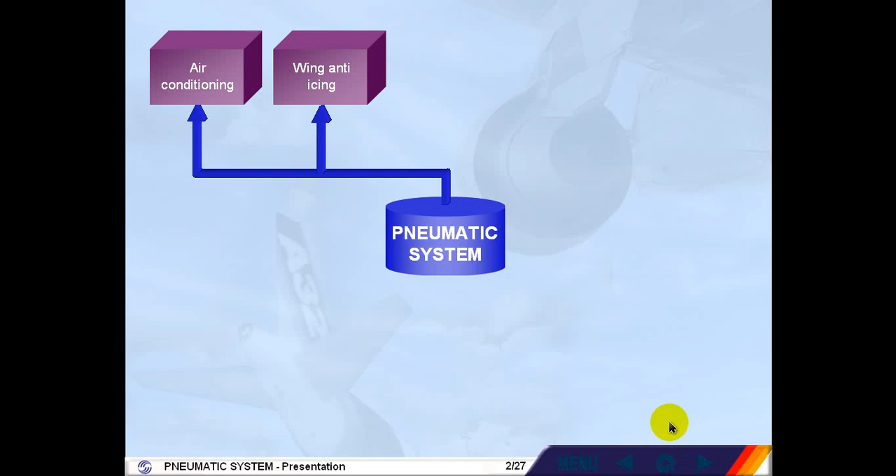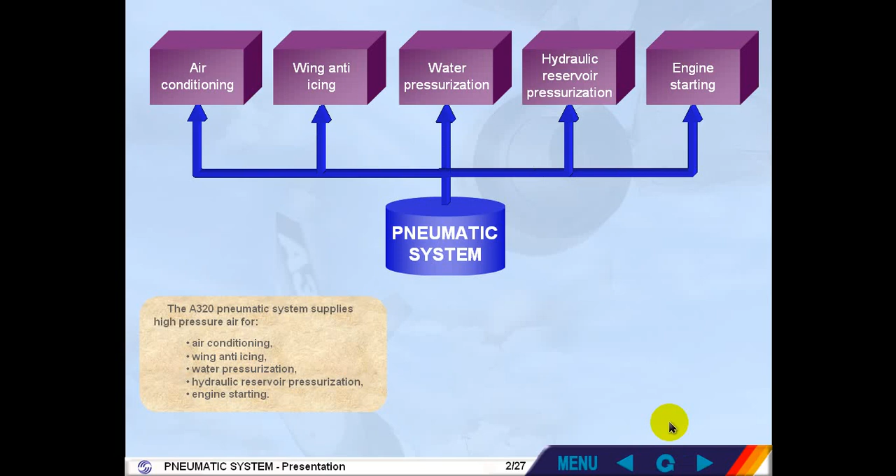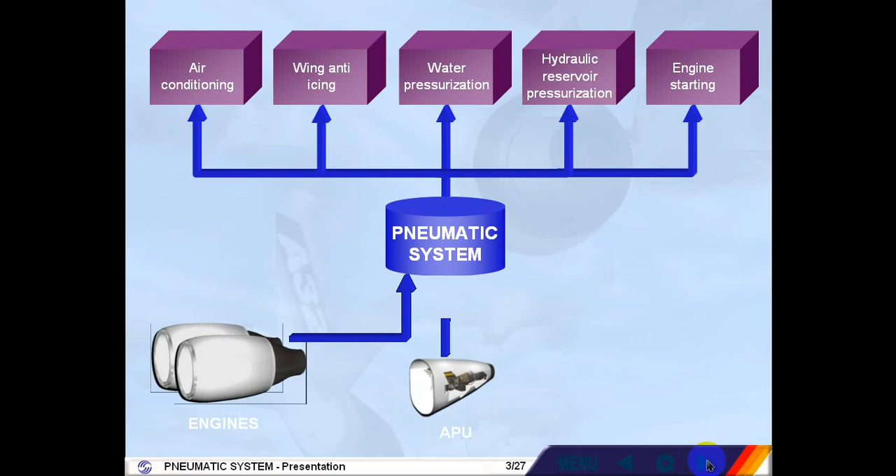The A320 pneumatic system supplies high-pressure air for air conditioning, wing anti-icing, water pressurization, hydraulic reservoir pressurization, and engine starting. High-pressure air can be supplied from three sources: the engine bleed system, the APU, and an external high-pressure ground power unit.

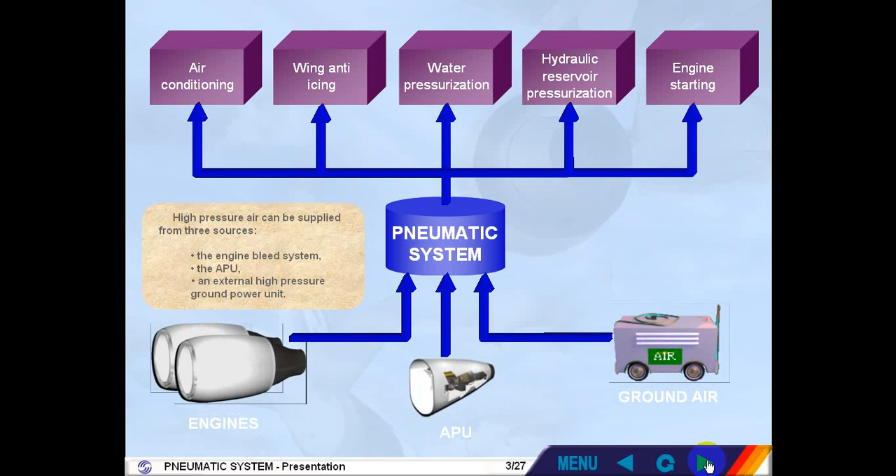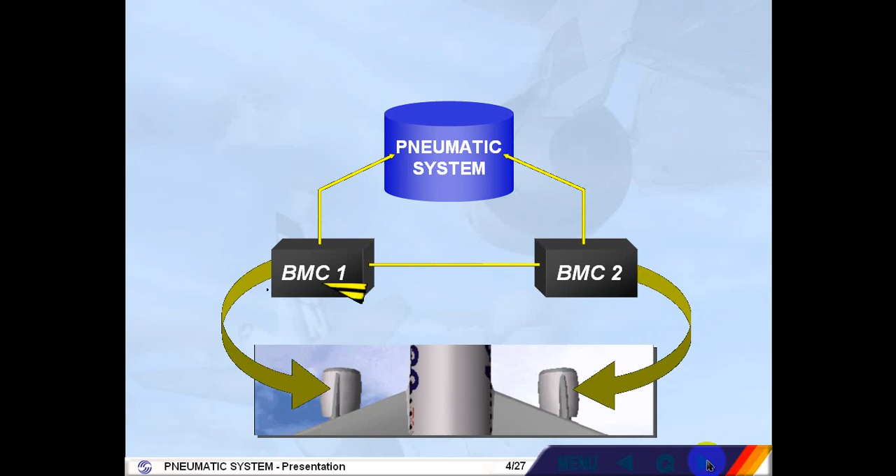The pneumatic system is controlled and monitored by two bleed monitoring computers, BMC. There is one BMC for each engine bleed system. Both BMCs are interconnected, and if one fails, the other takes over most of its functions.

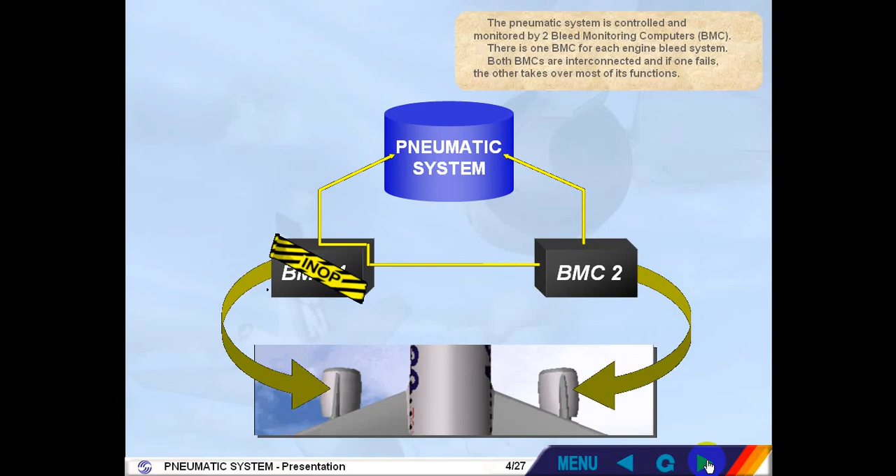There are hot air leakage detection loops installed in the vicinity of the hot air ducts in the fuselage, wings and pylons. If a leak is detected, a signal is sent to the BMCs, which automatically isolate the affected area.

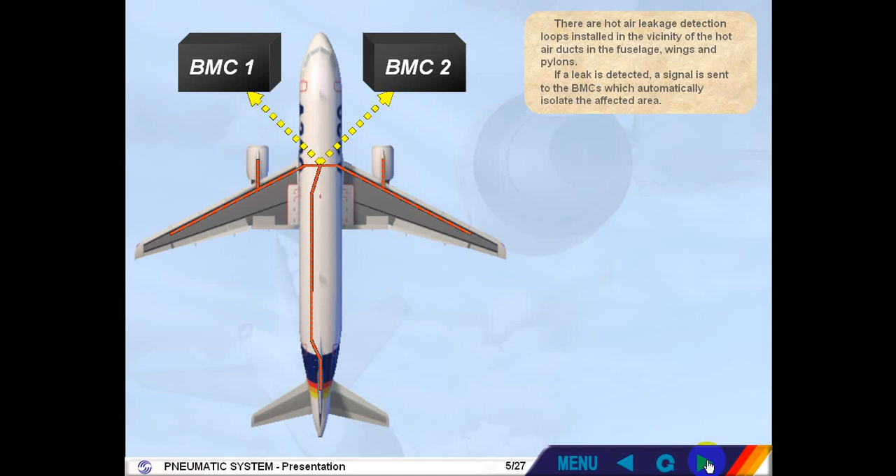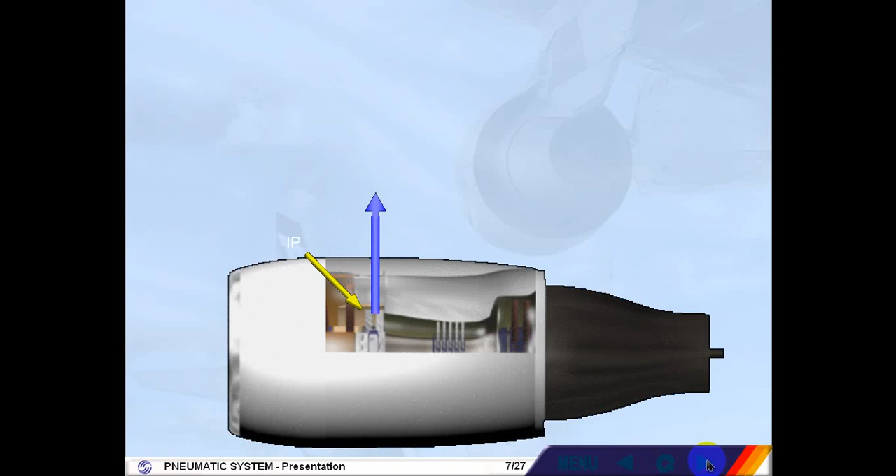In flight, the primary source for high-pressure air is the engines. Both engines have similar bleed systems. Air is bled from two compressor stages of the engine, the intermediate pressure IP port and the high pressure HP port. There is an HP valve which can cut off bleed air from the high pressure port. It is automatically controlled by the system.

The high pressure section HP is only used when there is insufficient pressure from the intermediate output IP, i.e. when the engines are at idle. Once the engine speed is high enough, the IP pressure is sufficient and the HP valve closes.

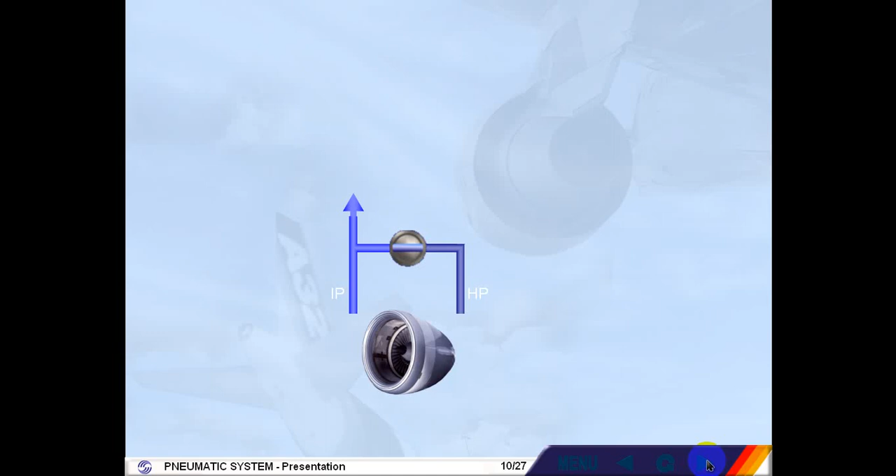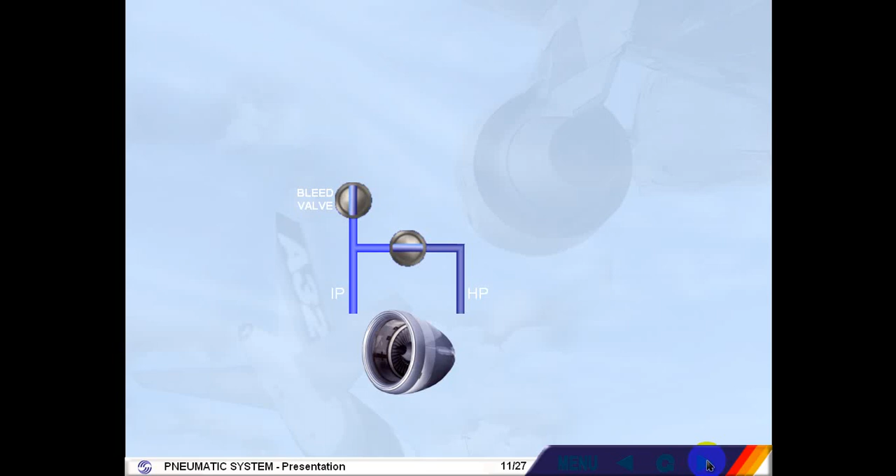The air extracted from the compressor then goes to a bleed valve which acts as a shut-off and pressure regulating valve. Since the temperature of the bleed air is high, it passes through a pre-cooler before being distributed to the users. The pre-cooler uses cool air from the engine fan to regulate the temperature.

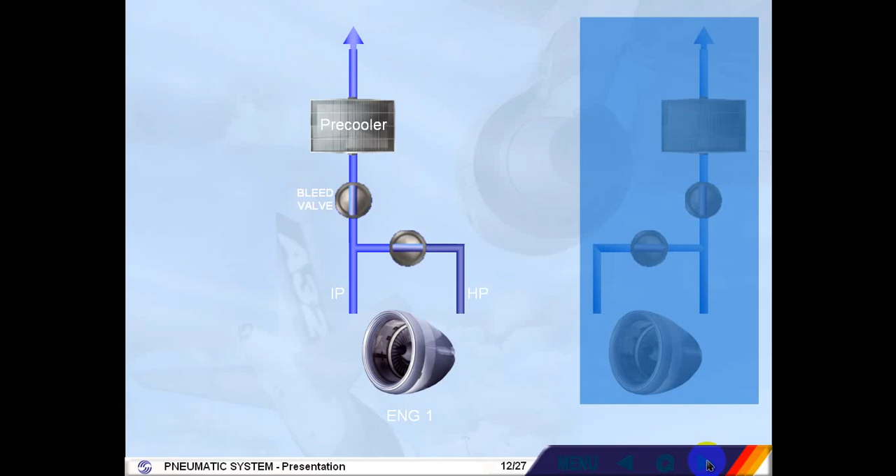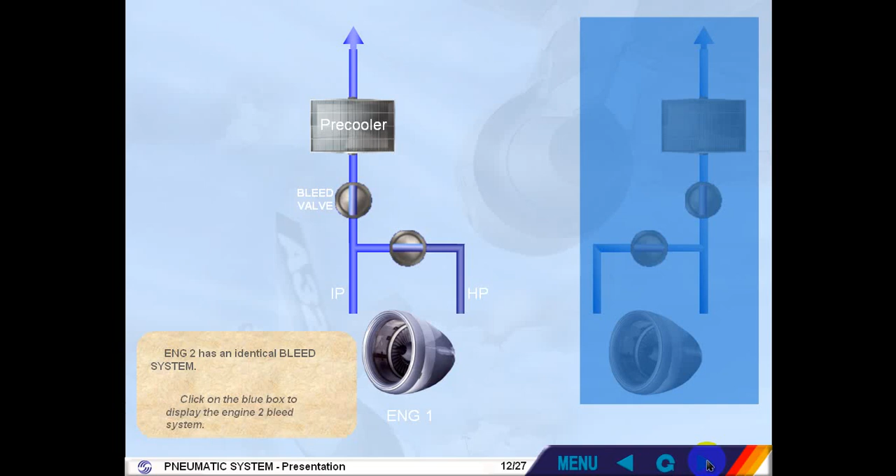Engine 2 has an identical bleed system. Click on the blue box to display the Engine 2 bleed system. Both systems are connected by a cross-bleed duct. A cross-bleed valve permits their interconnection or isolation.

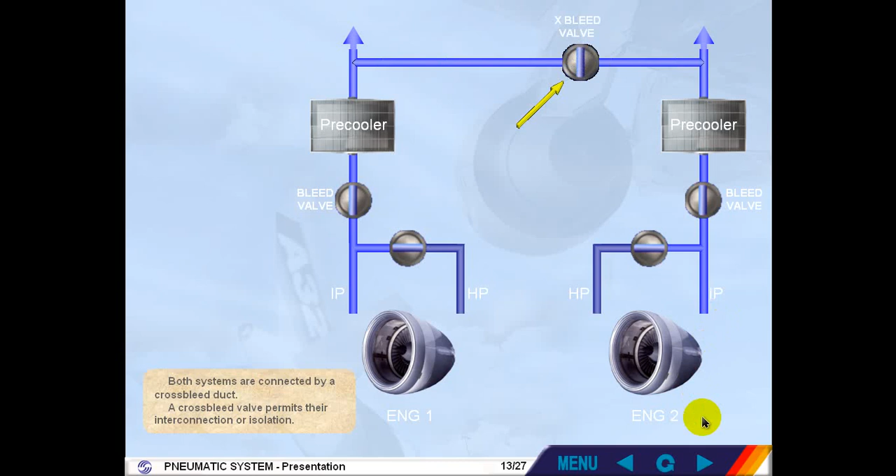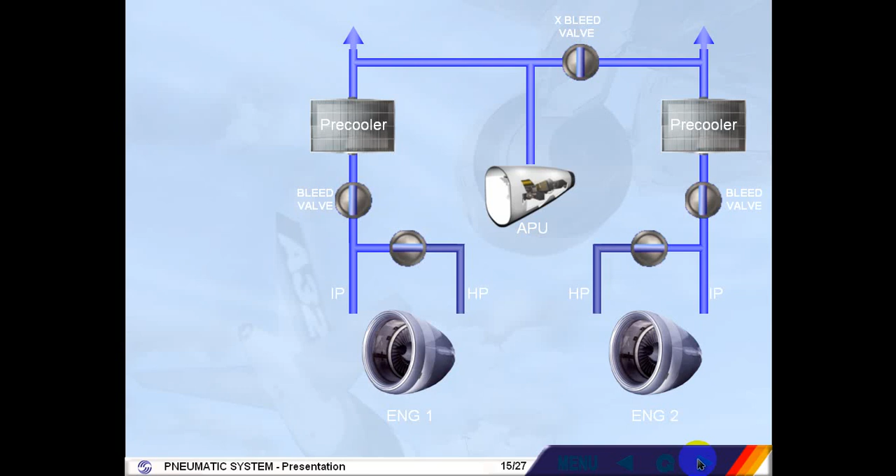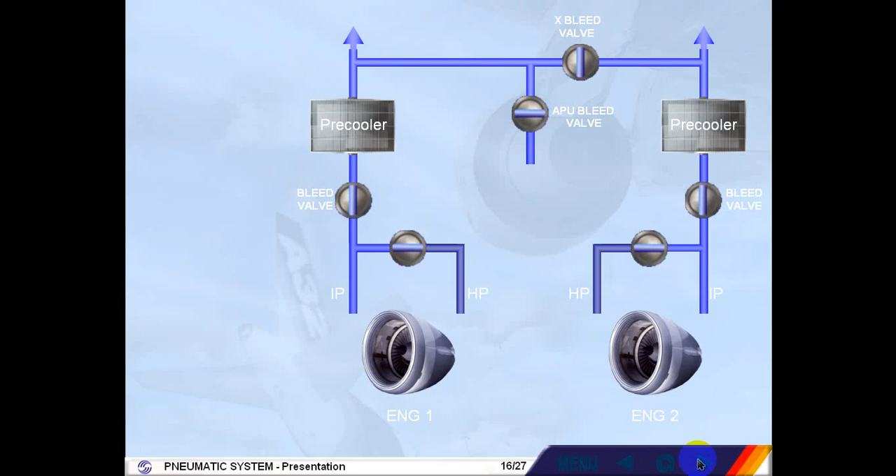The APU can also be used for bleed air supply. This is usually done on ground for air conditioning and for engine start. However, APU bleed air is also available in flight. APU bleed air is controlled by the APU bleed valve, which operates as a shut-off valve. Should the APU not be available, a high-pressure ground air unit can be connected. This completes the pneumatic system.

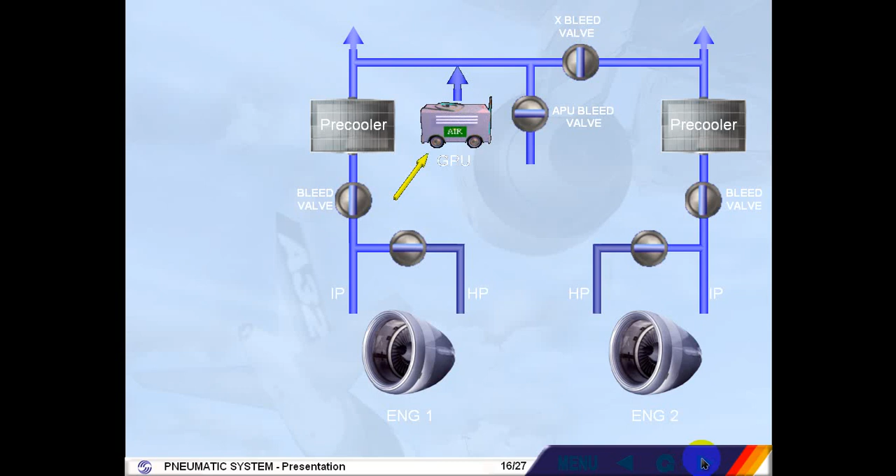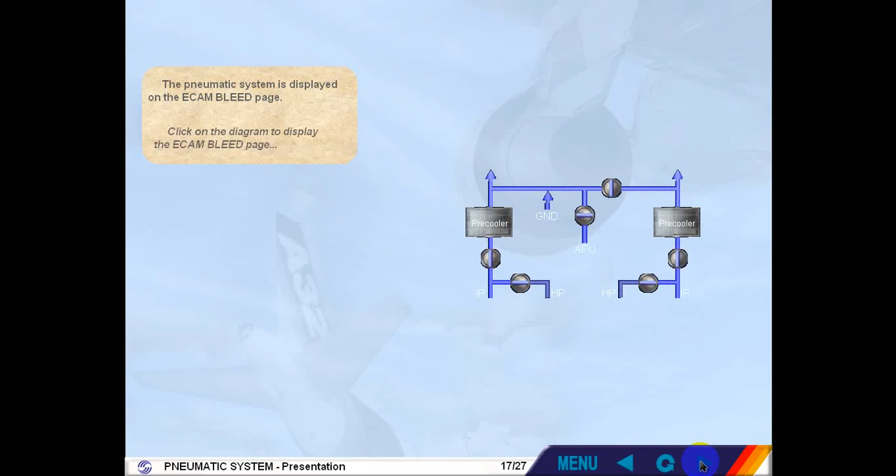We will now show you how system information is displayed to the pilots. The pneumatic system is displayed on the ECAM bleed page. Click on the diagram to display the ECAM bleed page. Information on the pneumatic system is displayed on the lower part of the ECAM bleed page. Note, we have shaded the upper part of the ECAM bleed page because it is related to the air conditioning chapter. This will be covered in a later module.

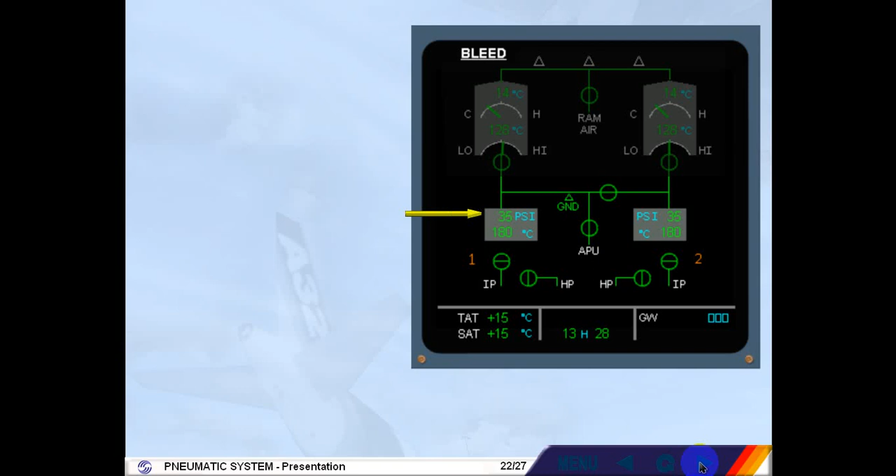Let's identify the system components on the ECAM page now. The IP and HP ports, the HP valves, the engine bleed valves, the pre-coolers, the APU bleed valve, the cross-bleed valve, the high-pressure ground connection. The following information is also displayed: bleed air pressure, bleed air temperature, engine identification numbers.

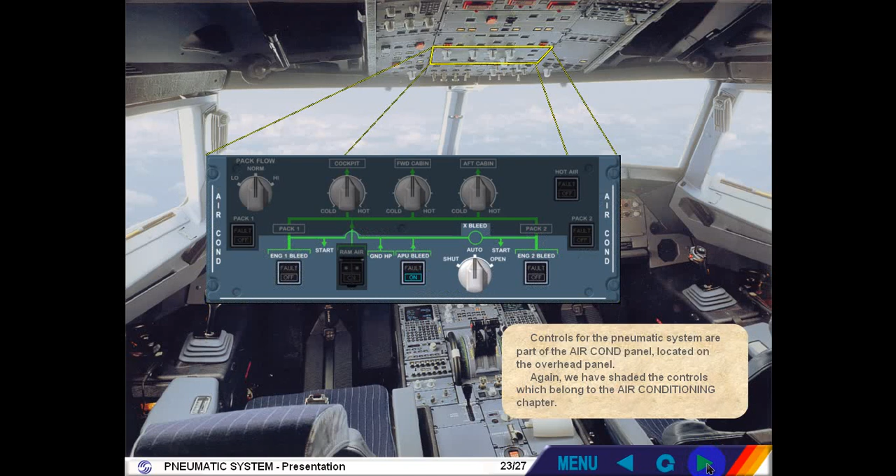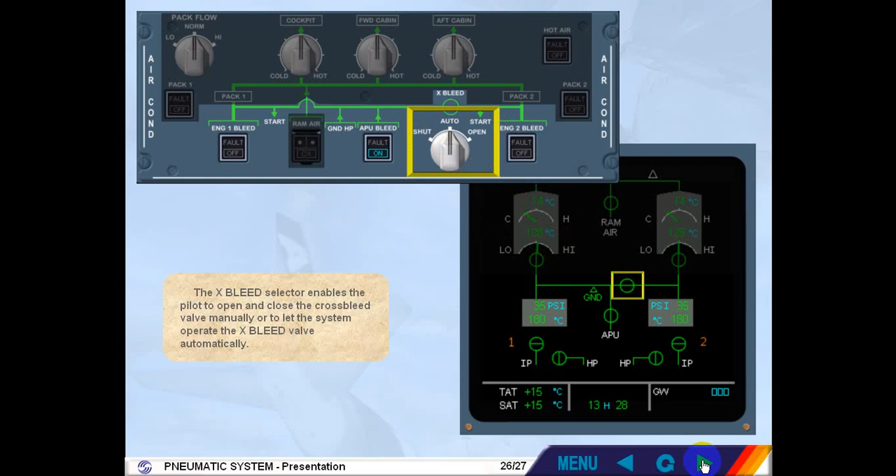Controls for the pneumatic system are part of the air conditioning panel, located on the overhead panel. Again, we have shaded the controls which belong to the air conditioning chapter. Each engine bleed valve is controlled by its associated push-button switch on the air conditioning panel. The APU bleed valve is controlled by its associated push-button switch. The cross-bleed selector enables the pilot to open and close the cross-bleed valve manually or to let the system operate the cross-bleed valve automatically. You will learn to interpret all the indications and operate these controls in the normal and abnormal operation modules.

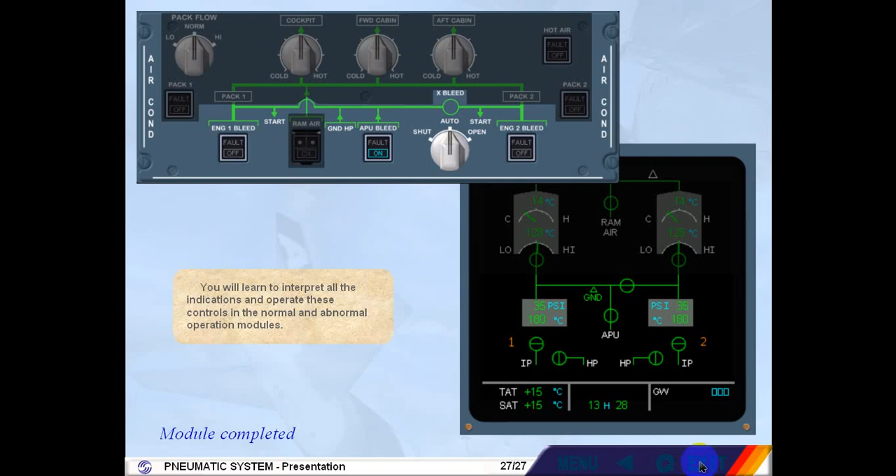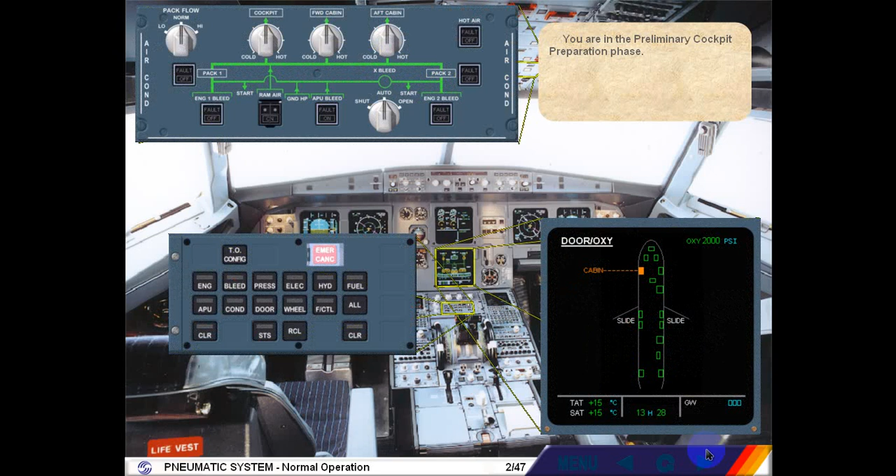You are in the preliminary cockpit preparation phase. To better illustrate what occurs in the pneumatic system, select the ECAM bleed page using the ECAM control panel. Let's talk about the indications on the ECAM bleed page. The engine identification numbers are displayed amber because the engines are not running. During preliminary cockpit preparation, all white lights must be extinguished. With the engine bleed push-button switch in the lights out position, the bleed valves are automatically controlled by the system.

Observe the symbology on the ECAM. The bleed valves are cross-line green because they are fully closed. The HP valves are also automatically controlled by the system. They are displayed cross-line green to indicate that they are fully closed. The bleed temperature is displayed in green. The bleed pressure is displayed in amber because no pressure is supplied. The ground HP connection indication is always displayed in green when the aircraft is on the ground, whether the ground unit is connected or not.

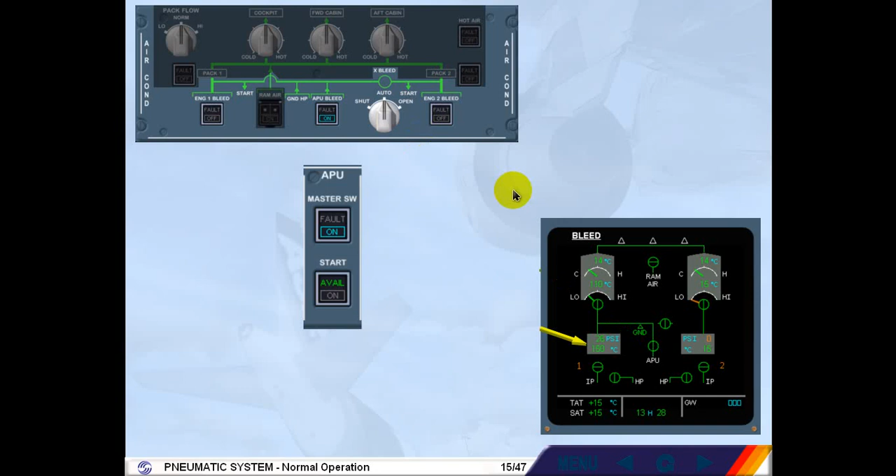Observe the indications. The APU bleed valve is displayed inline green, indicating it is now open. The left side bleed pressure and temperature are displayed in green because they are in the normal range. The cross-bleed valve is automatically opened. It is displayed amber during transit and inline green when fully open.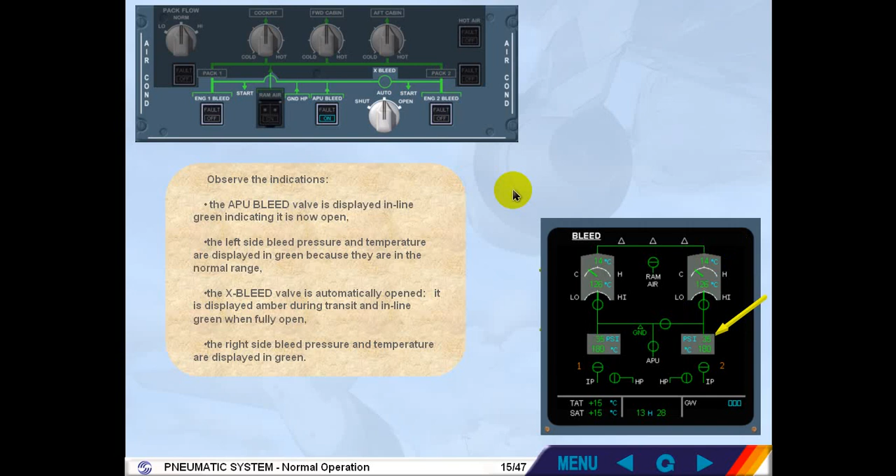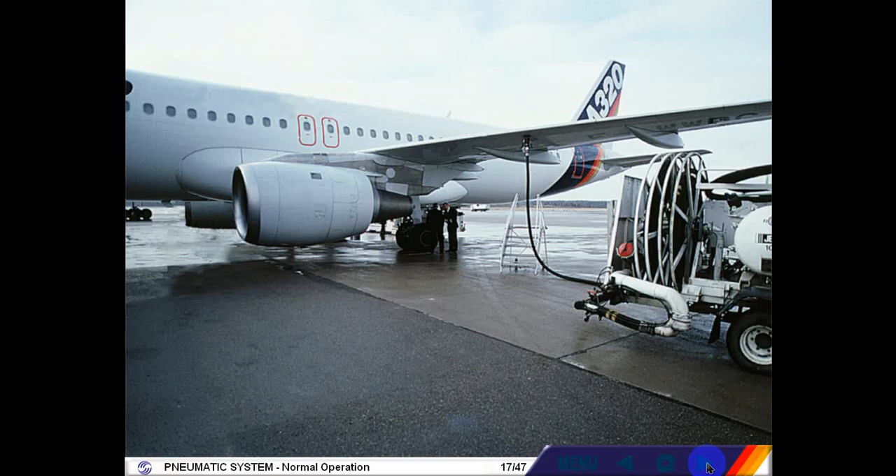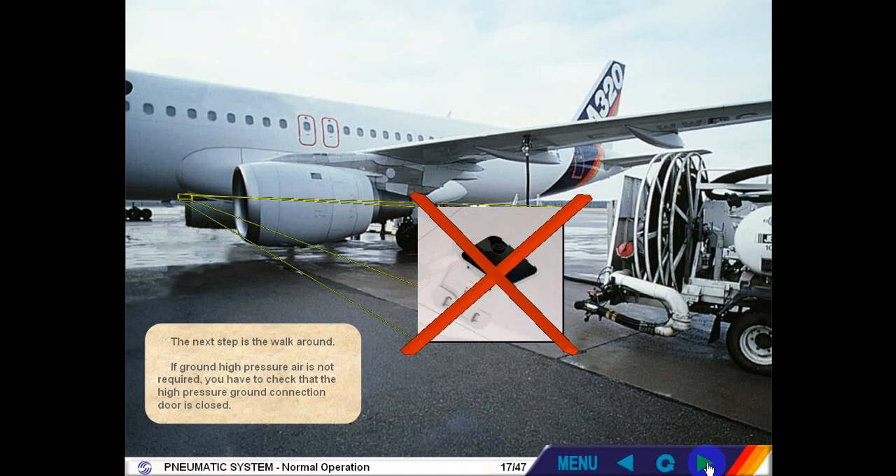The right side bleed pressure and temperature are displayed in green. As you have learned in the APU chapter, the memo APU bleed is displayed on the engine warning display. The next step is the walk-around. If ground high-pressure air is not required, you have to check that the high-pressure ground connection door is closed. Usually, APU bleed air is used for engine start.

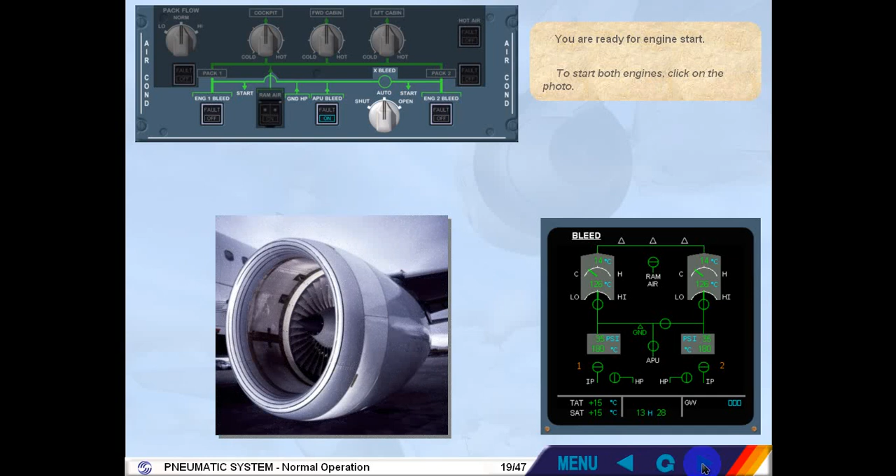The pressure displayed on the bleed page is also indicated on the ECAM engine page, which will be explained in the engine chapter. You are ready for engine start. To start both engines, click on the photo. Notice that the engine identification numbers have turned white, indicating that the engines are running. The engine bleed valves remain closed because the APU bleed valve is open and the APU has priority over the engine bleed. Now you may switch off the APU.

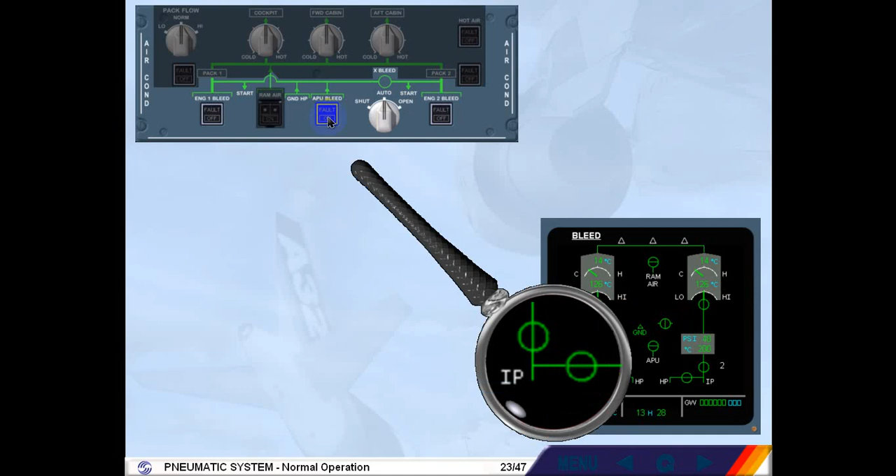Switch APU bleed off. Observe the ECAM. The APU bleed valve is closed. The cross-bleed valve is automatically closed. It is displayed amber during transit. The engine bleed valves and HP valves are displayed inline green because they have been automatically opened.

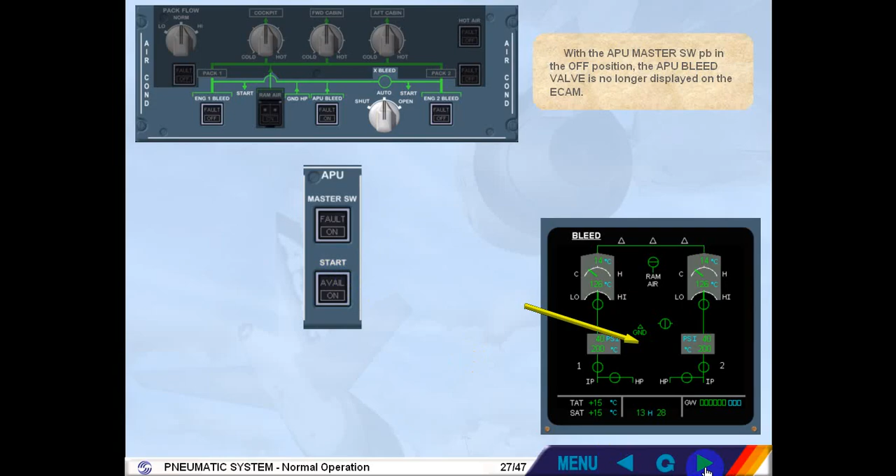We will now switch off the APU. Click on the APU master switch. With the APU master switch push button in the off position, the APU bleed valve is no longer displayed on the ECAM. We will now talk about the changes that occur in the pneumatic system during takeoff. Note, normally the ECAM engine page is displayed for takeoff. For training purposes, we will display the ECAM bleed page.

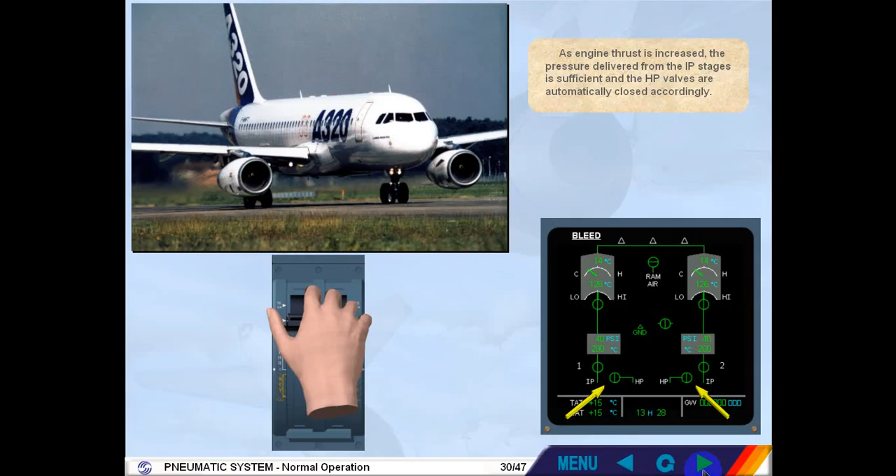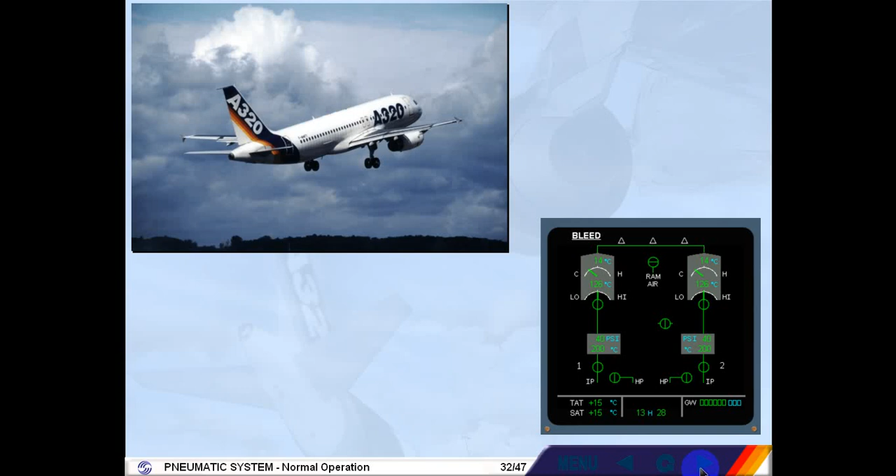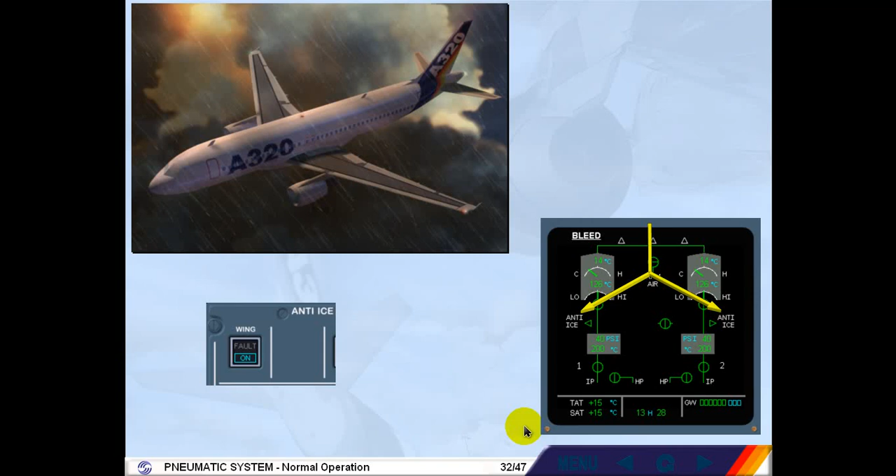As engine thrust is increased, the pressure delivered from the IP stages is sufficient and the HP valves are automatically closed accordingly. As soon as the aircraft lifts off, the ground HP connection indication disappears. Remember that it is only displayed on the ground. During flight, you might need to switch on the wing anti-ice system, which uses hot bleed air from the pneumatic system. Observe the indication on the ECAM bleed page when wing anti-ice is used. Note, for further information, refer to the Ice and Rain Protection chapter.

Let's now see what happens in the pneumatic system when you are back on the ground. The ground HP air connection indication is displayed. With the engines at idle, the HP valves are automatically opened. When the APU is started, the APU bleed valve is displayed. Just before engine shutdown, we select the APU bleed on. Observe the indications on the ECAM. Select APU bleed on. Press the APU bleed push button switch to on.

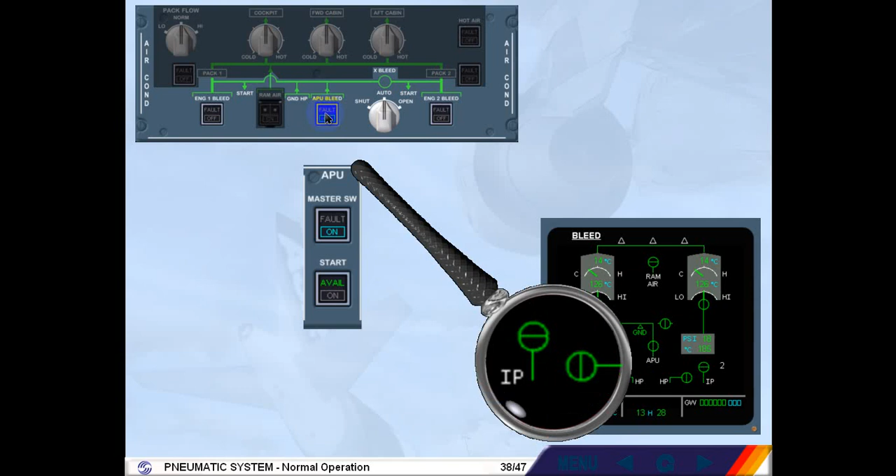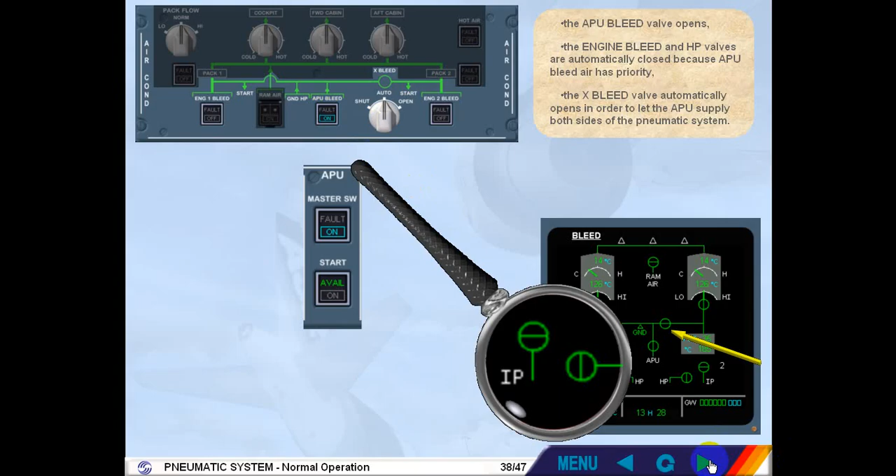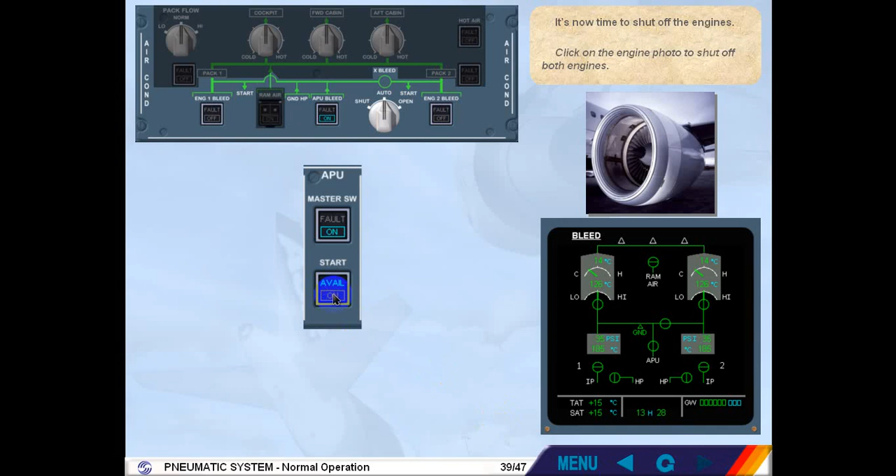The APU bleed valve opens. The engine bleed and HP valves are automatically closed because APU bleed air has priority. The cross-bleed valve automatically opens in order to let the APU supply both sides of the pneumatic system. It's now time to shut off the engines. Click on the engine photo to shut off both engines. Observe that the engine identification numbers became amber because the engines are not running.

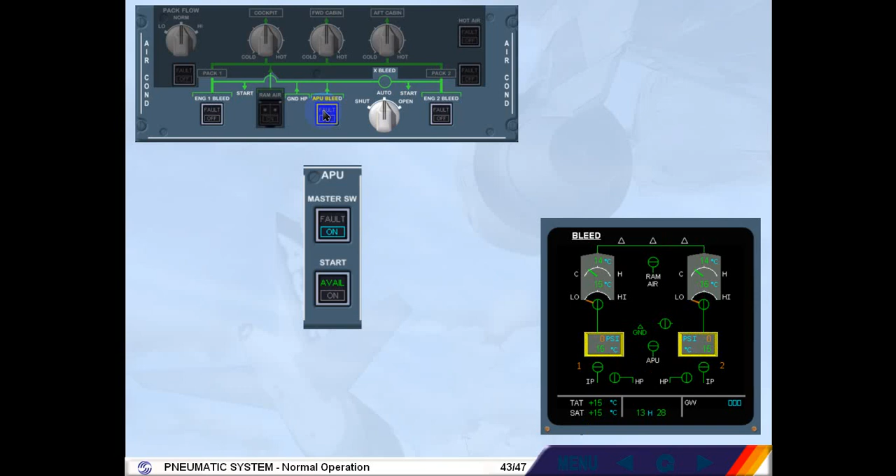Before leaving the aircraft, we will shut down the APU. But first, we must switch off the APU bleed. Switch APU bleed off. Observe the indications. The cross-bleed valve is automatically closed. The APU bleed valve is closed. The bleed pressure is displayed amber because no pressure is supplied. When the APU has shut down, the APU bleed valve is no longer displayed. This completes the normal operation of the pneumatic system.

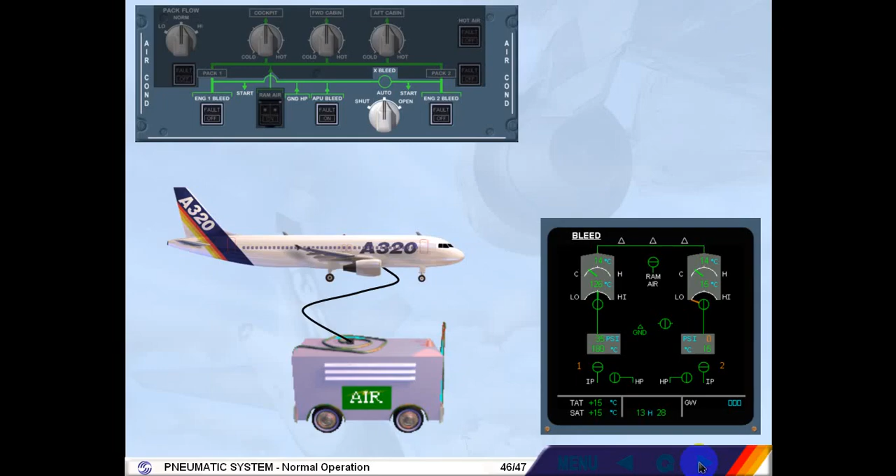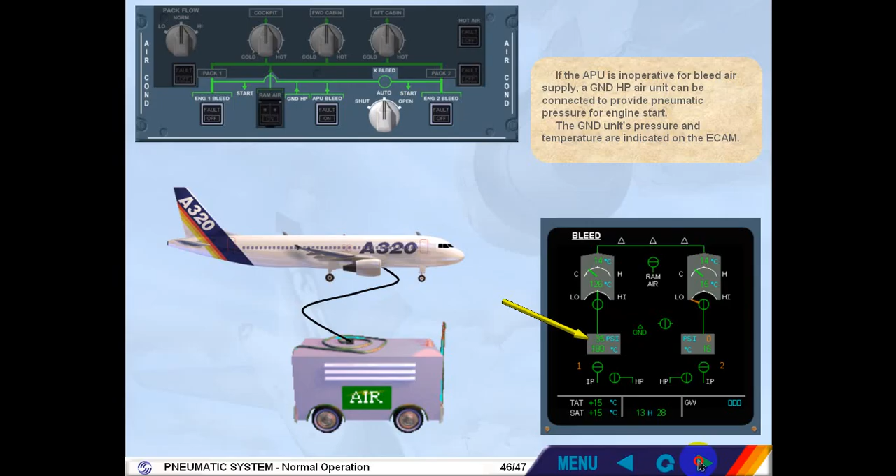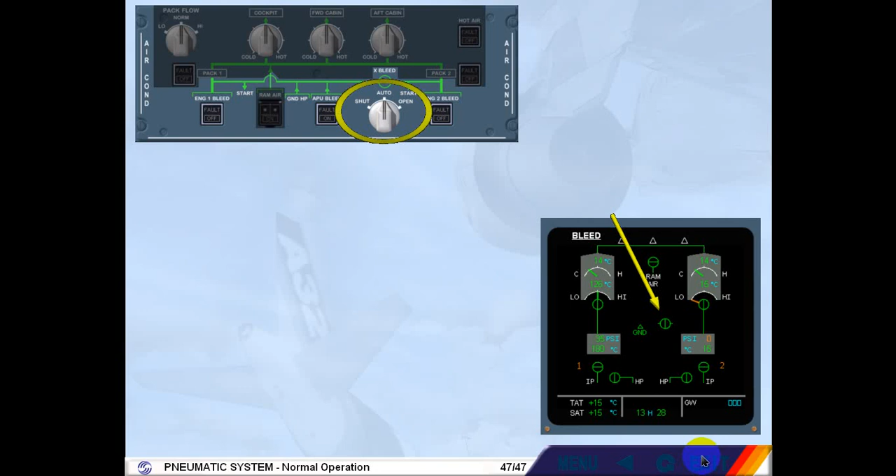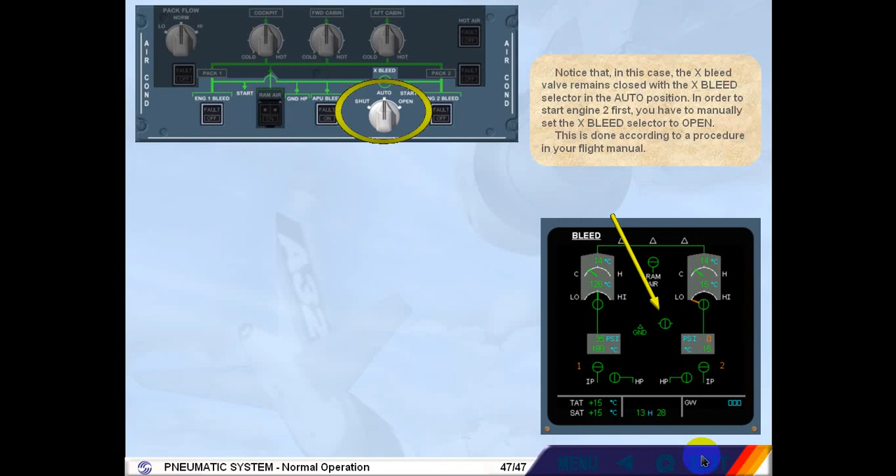We will now discuss the indications associated with ground HP air supply. If the APU is inoperative for bleed air supply, a ground HP air unit can be connected to provide pneumatic pressure for engine start. The ground unit's pressure and temperature are indicated on the ECAM. Notice that in this case, the cross-bleed valve remains closed, with the cross-bleed selector in the auto position. In order to start engine 2 first, you have to manually set the cross-bleed selector to open. This is done according to a procedure in your flight manual. This concludes the pneumatic normal operation module.

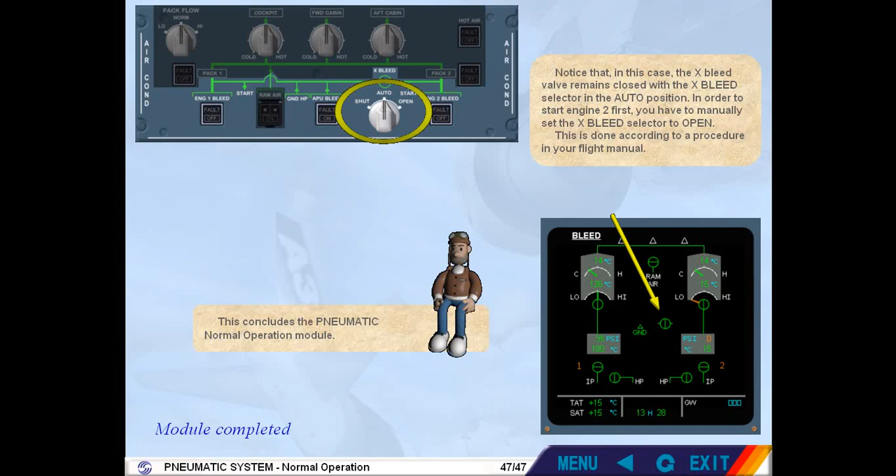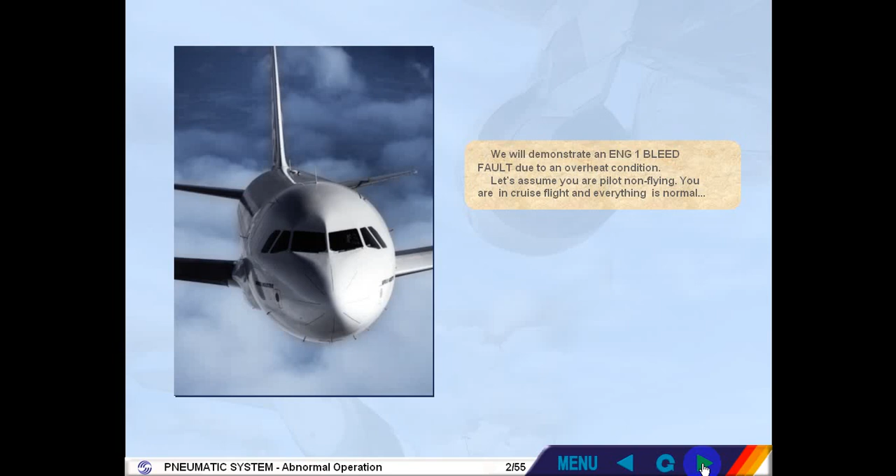We will demonstrate an engine 1 bleed fault due to an overheat condition. Let's assume you are the pilot non-flying. You are in cruise flight and everything is normal. On the engine warning display, read the title of the failure. The engine 1 bleed system has failed.

On the bleed system page, which has been called automatically, the bleed air temperature is displayed amber because it is abnormally high. This is the reason for the failure. The amber fault light on the Engine 1 bleed push-button switch confirms the failure.

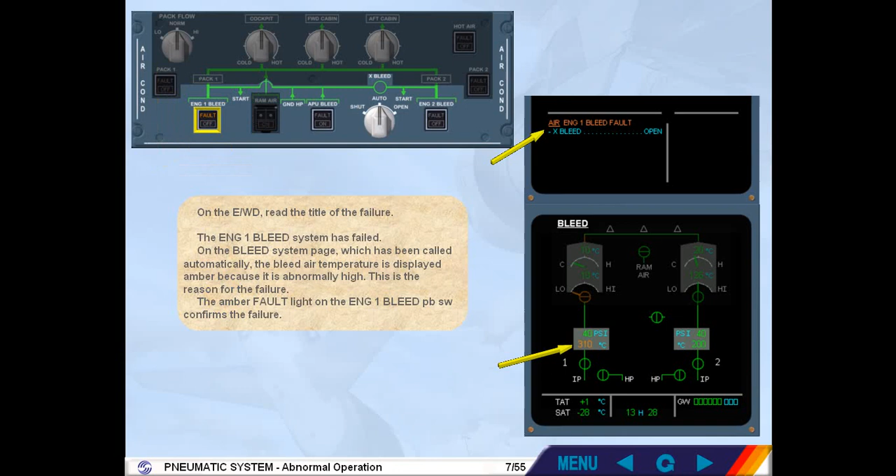The BMC detects the overheat and automatically closes the Engine 1 bleed valve to protect the system. With the valve closed, the bleed pressure falls to 0 and the temperature decreases. The Engine 1 bleed system is no longer available.

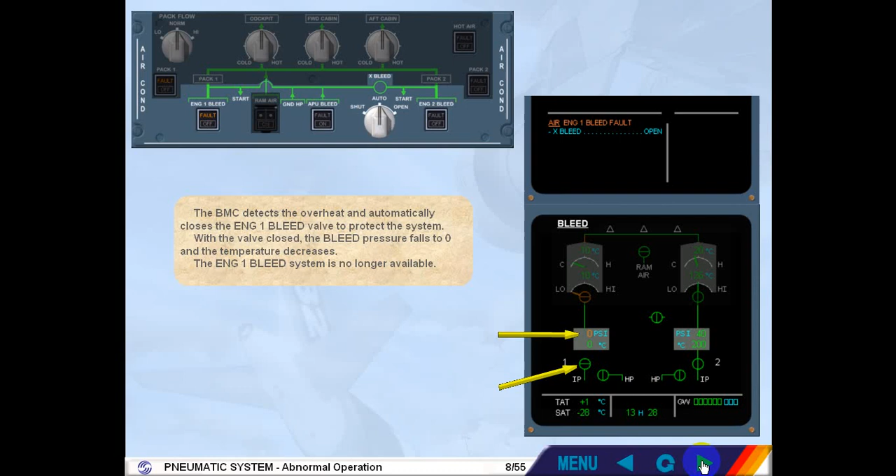Notice that the Engine 1 bleed push-button switch fault light remains illuminated, even though the temperature is now within limits. This is because the BMC considers the Engine 1 bleed system faulty and keeps the Engine 1 bleed valve closed for the rest of the flight.

The pilot flying will ask you to perform the ECAM actions. Perform ECAM action. Set the cross-bleed selector to the open position. Observe the ECAM. The cross-bleed valve is displayed amber during transit and in-line green when fully open. The pressure and temperature values for the left side of the system are back to normal because now both sides are being supplied by Engine 2.

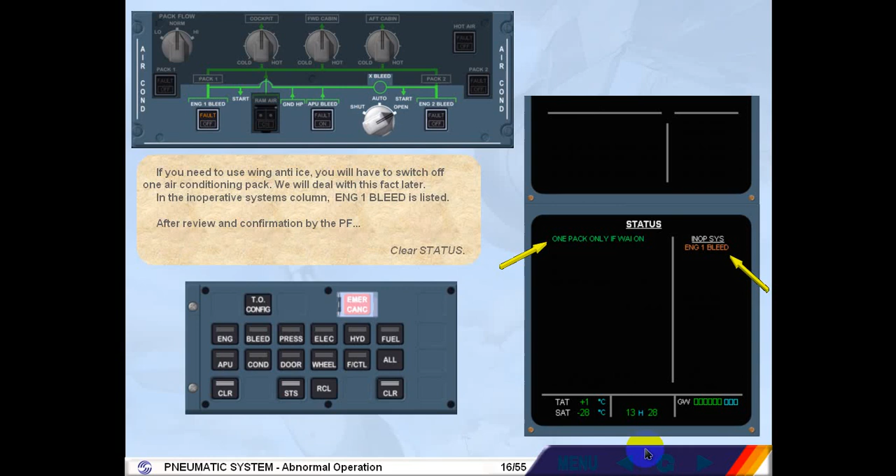After review and confirmation by the pilot flying, clear air. If you need to use wing anti-ice, you will have to switch off one air conditioning pack. We will deal with this fact later. In the Inoperative Systems column, Engine 1 bleed is listed. After review and confirmation by the pilot flying, clear status. ECAM action completed.

Now we will see what happens if you have to use wing anti-ice with the Engine 1 bleed still inoperative. Let's assume you encounter icing conditions during the remaining part of your flight and you decide to switch on your wing anti-ice. Switch wing anti-ice on. The Engine 1 bleed fault procedure is automatically recalled on the engine warning display, and the ECAM procedure requires that you switch pack 1 off.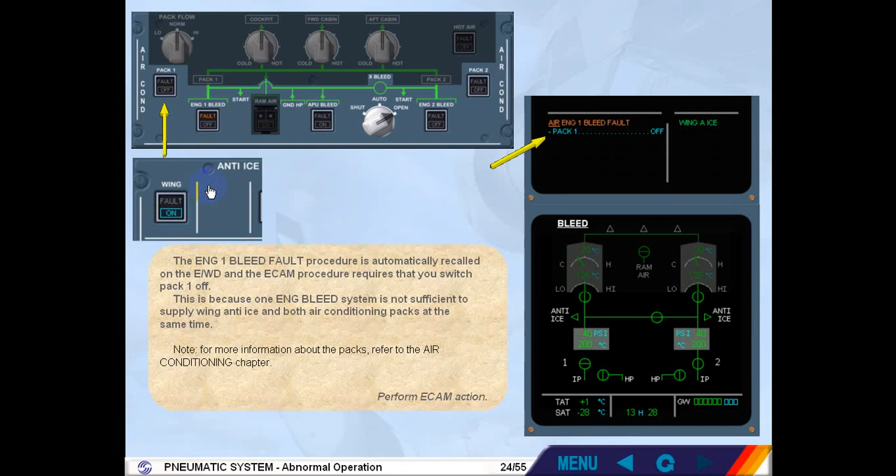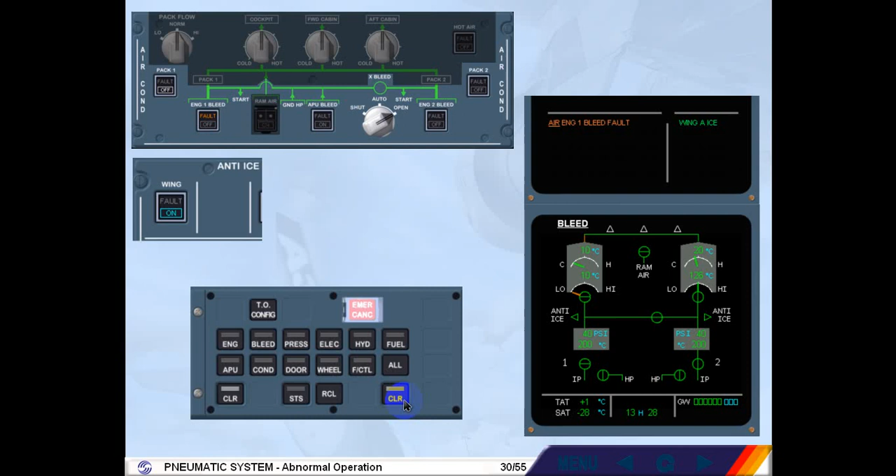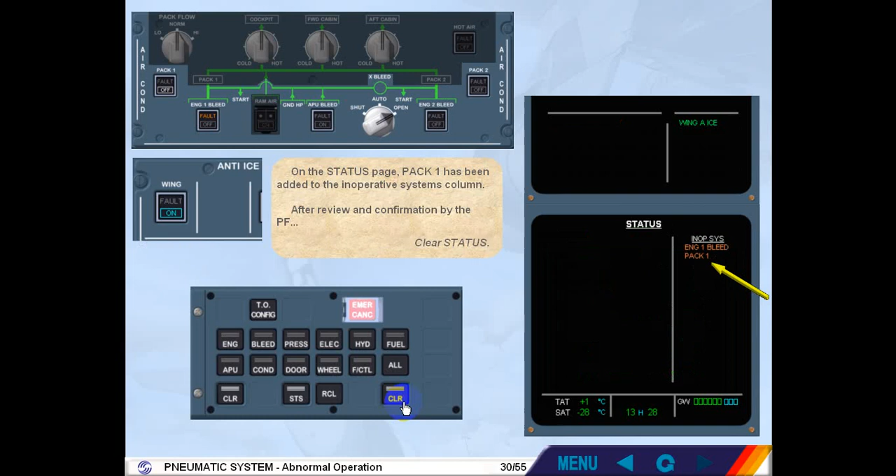This is because one engine bleed system is not sufficient to supply wing anti-ice and both air conditioning packs at the same time. Note, for more information about the packs, refer to the air conditioning chapter. Perform ECAM action. After review and confirmation by the pilot flying, clear air. On the status page, Pack 1 has been added to the Inoperative Systems column. After review and confirmation by the pilot flying, clear status. ECAM action completed.

For training purposes, to teach you more about the pneumatic system, we will continue by adding another failure to your previous configuration. This will be a left wing leak. On the engine warning display, read the title of the failure. On the SD, the ECAM bleed page is automatically presented. On the air conditioning panel, the indications from the previous failure remain unchanged.

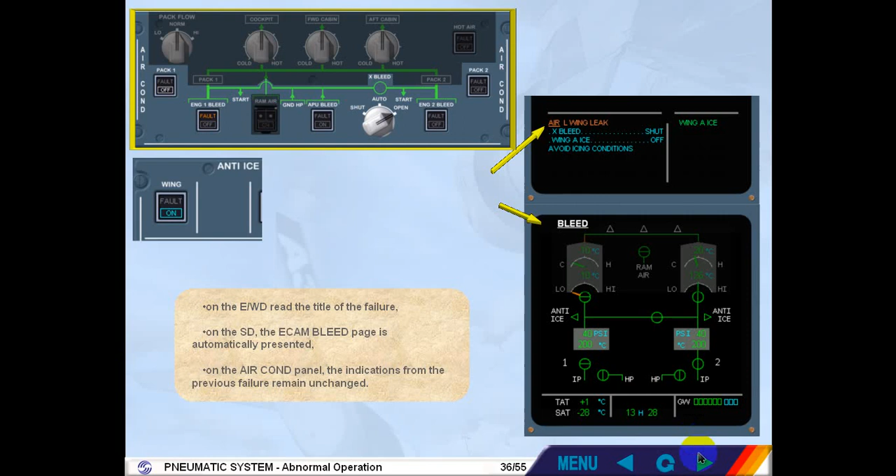The title of the failure indicates that a bleed leakage in the left wing has been detected. The left side of the bleed system has to be shut down in order to prevent any damage from leaking hot air. The first line of the ECAM procedure requires you to switch the cross-bleed selector to the shut position. With the selector in auto position, the cross-bleed valve would have been closed automatically, but remember, you have opened it manually in the previous procedure.

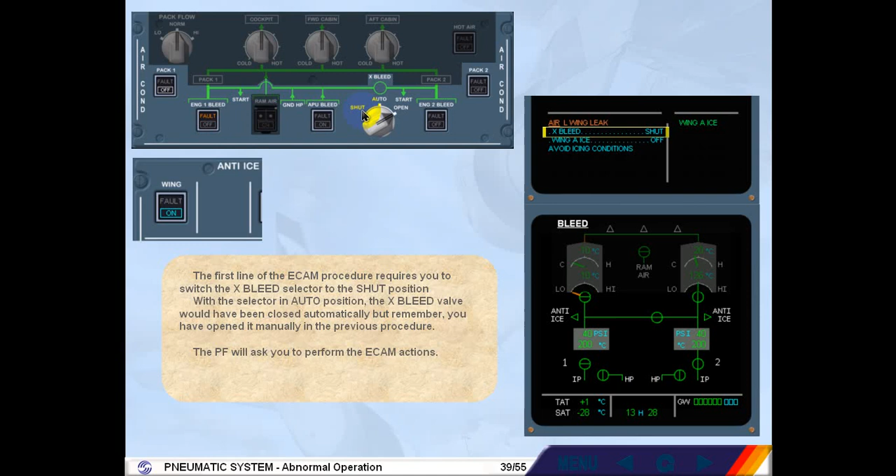The pilot flying will ask you to perform the ECAM actions. Perform ECAM action. Set the cross-bleed selector. Observe the indications. The cross-bleed valve closes. The pressure of bleed system 1 returns to 0. Since there is no hot air supplied, the left wing anti-ice valve indication becomes amber. The wing anti-ice indications will be explained further in a later module.

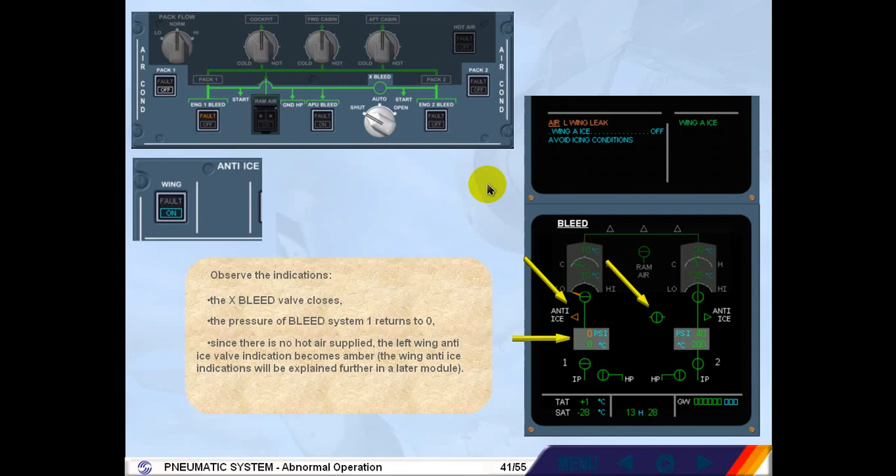Continue ECAM action. The wing anti-ice was switched off because you do not want to de-ice one wing only. The ECAM advises you to avoid icing conditions for the remaining part of the flight. After review and confirmation from the pilot flying, clear air.

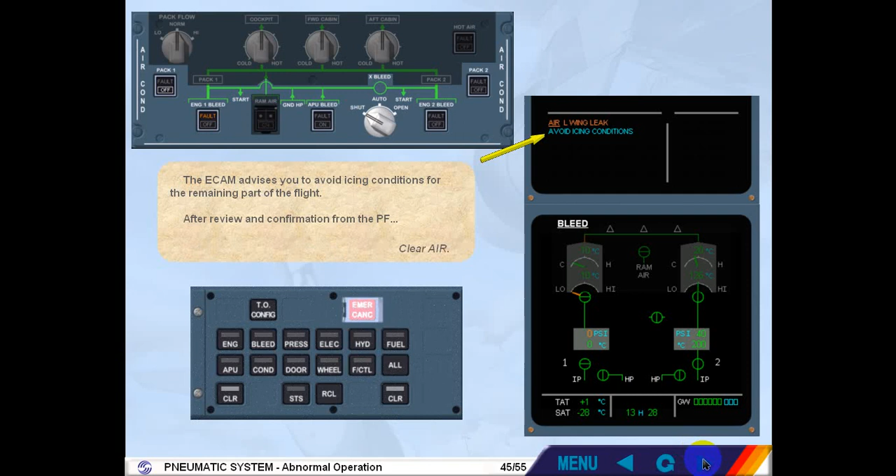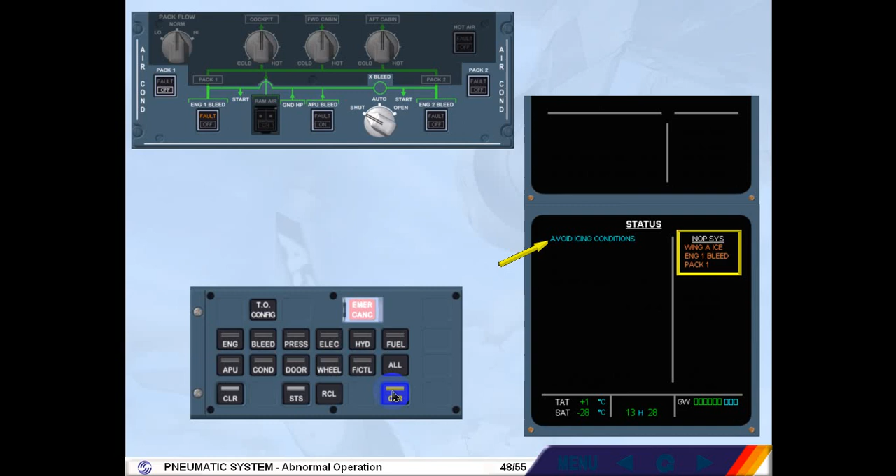The status page also informs you that you have to avoid icing conditions. The wing anti-ice indication has been added to the inoperative systems column. The engine 1 bleed and pack 1 indications remain from the previous failure. After review and confirmation from the pilot flying, clear status. ECAM action completed.

We will now briefly look at several abnormals without performing the procedures to see the remaining indications of the pneumatic system. In normal operation, when you use APU bleed, the cross-bleed valve automatically opens. If it should fail to open, there is an ECAM caution and the cross-bleed valve is displayed cross-line amber to indicate disagreement.

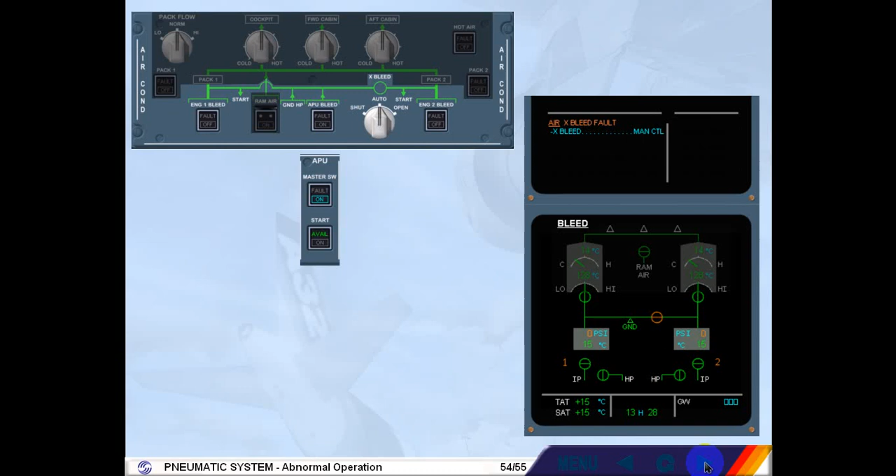Conversely, if the cross-bleed valve should fail to close in automatic mode, e.g. after the APU bleed has been switched off, it is displayed in-line amber, accompanied by an ECAM caution. Accordingly, the engine bleed valves and the HP valves are displayed amber if their position disagrees with the normal position.